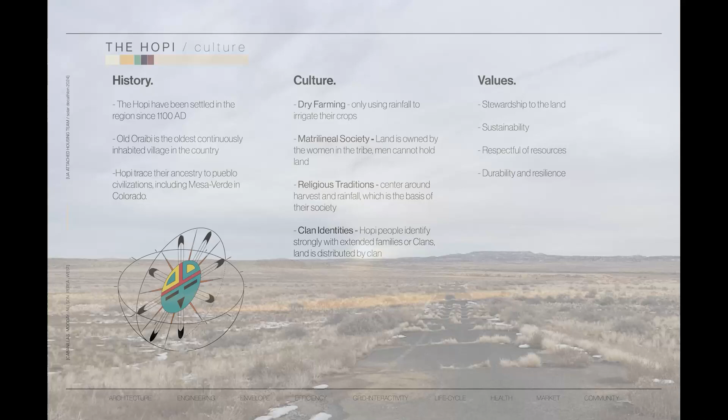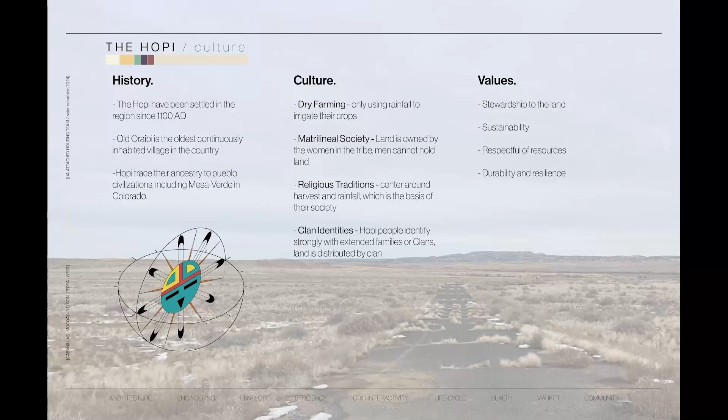We had the incredible opportunity to visit the tribe in January, where we learned that the Hopi have lived on their native land for thousands of years. Land is the basis of many aspects of their resilient culture, grounding their heritage within this landscape. Their values of stewardship to the land, sustainability, and resource savviness are apparent in their day-to-day practices, namely in dry farming and religious celebrations.

Of the 14,000 registered tribe members, only about half reside on the reservation, a number that is declining. Many young Hopi leave for job and educational opportunities in larger cities and often do not return, leading to a significant gap in the young and working age populations. This trend comes at the cost of losing touch with Hopi culture.

The aim is to encourage these populations to stay by creating Tawaovi to offer job opportunities, education, and modern conveniences on the reservation. Many of the Hopi still live in villages with traditional homes. 35% of Hopi homes lack running water and electricity, leading to an acute lack of safe and comfortable housing on the reservation. The Hopi asked for an attached housing proposal to help solve this problem.

The Hopi tribe used a detailed SWOT analysis to define the goals of the new village. They emphasized their rich historical and cultural values, but acknowledged challenges such as their coal dependency, lack of housing, and lack of infrastructure, issues that we aim to address through our project.

In their landmark Economic Strategy Council in 2000, the Hopi outlined the following vision for the future of the tribe: Hopi should be a place where Hopi culture and religion are strong, sacred sites are protected, culturally and environmentally sensitive development occurs, the land is looked after, there are jobs and businesses, quality infrastructure serves everyone, everyone has their own quality house, and public facilities serve all needs.

Our mission is to help the Hopi obtain their vision by providing comprehensive housing solutions that reinvest in their community and keep true to Hopi values.

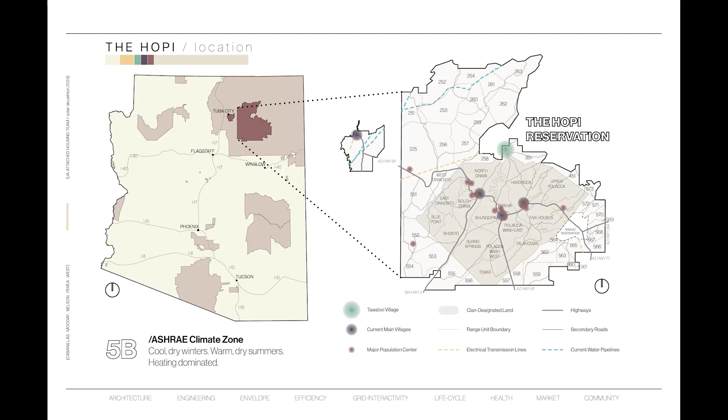Tawaovi, translating to Place of the Sun, or Sun Village, was chosen by the Hopi tribe to be on a remote site away from clan and spiritual lands. The project is in ASHRAE Climate Zone 5B, so it is cool, dry, and heating dominated, with an annual temperature range between 20 and 90 degrees.

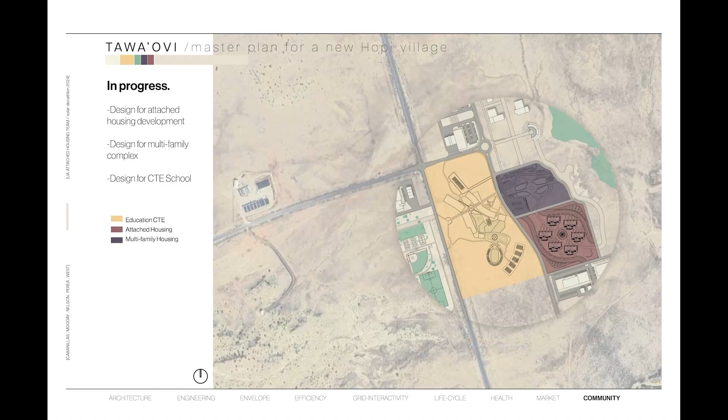This is the site of Tawaovi in its current state, as there has already been progress done on the solar farm. This is the progress being proposed by the Solar Decathlon Studio, including our attached housing site, seen in red, which neighbors the multifamily complex and the education building. These 3 projects will act as a strong base for Tawaovi, providing necessities.

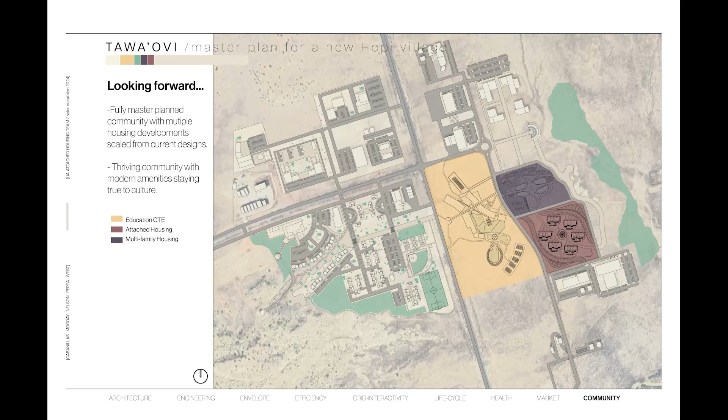In the future, this is what Tawaovi is imagined to expand to, creating a culturally rich and self-sufficient community that utilizes our scalable design to provide more housing as the community grows.

The Hopi's coal-dependent economy was devastated in 2019 with the closure of the Peabody coal mine, in which the nation lost 85% of their non-federal revenue, ultimately leading to their commitment to transitioning to clean and renewable energy moving forward. To achieve our ambitious goals, the first step is to establish a resilient energy source for this remote community, which is too far away to be connected to the main electric grid.

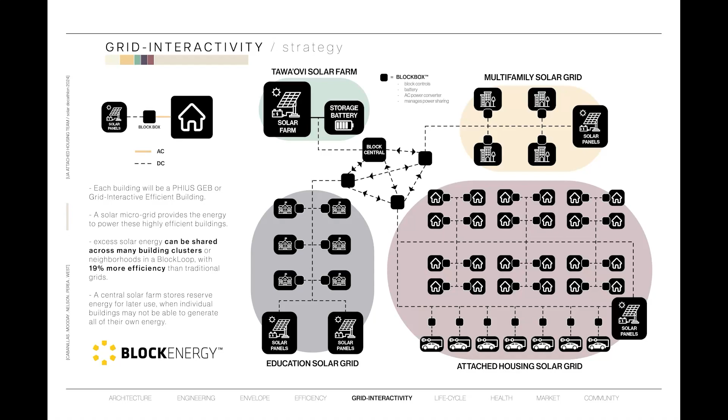Working with the existing solar farm, we are designing each building to be a PHIUS GEB, Grid Interactive Efficient Building, that draws energy from within a microgrid. Partnering with Block Energy, we utilize their innovative block boxes to distribute DC electricity from solar PV to each building.

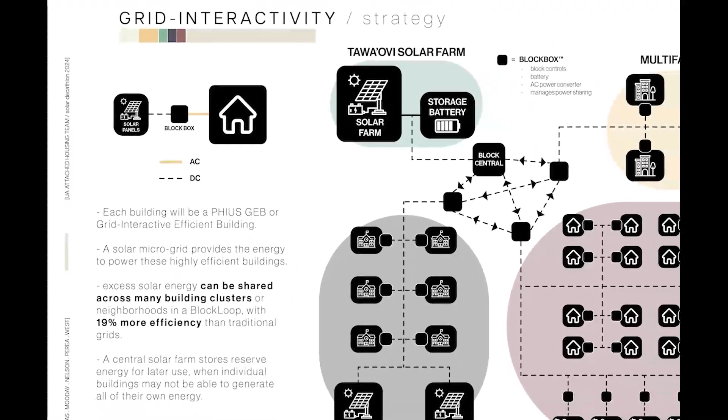These interconnected smart batteries allow seamless energy sharing, resulting in 19% higher efficiency than traditional grid systems. Moreover, neighborhood block loops can be connected to create a resilient grid of grids routed back to the solar farm, smoothing out duck curves, and most importantly, providing energy sovereignty to the Hopi.

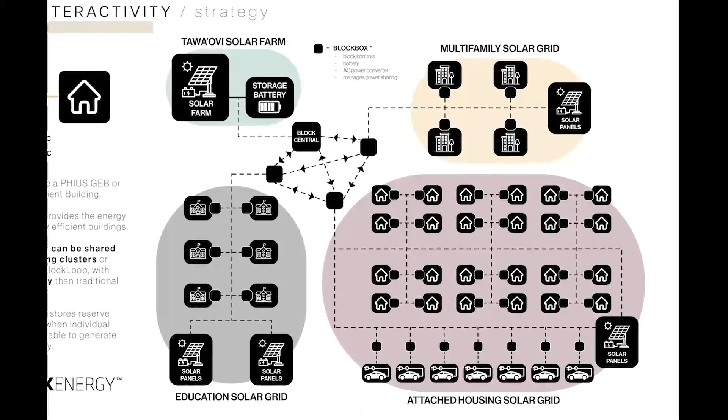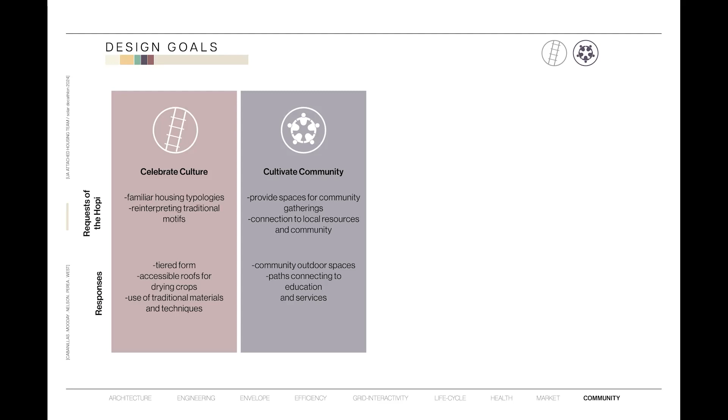We developed 4 goals that respond to the specific requests of the Hopi. First, we want to celebrate culture by implementing traditional Hopi design motifs that will allow people to resonate with the building. Second, we want to cultivate community by providing shared cultural spaces that will allow neighbors to connect. Third, we want to prioritize efficiency by adhering to PHIUS Zero standards and emphasizing passive strategies. Lastly, we want to promote well-being through careful site design and the use of clean energy.

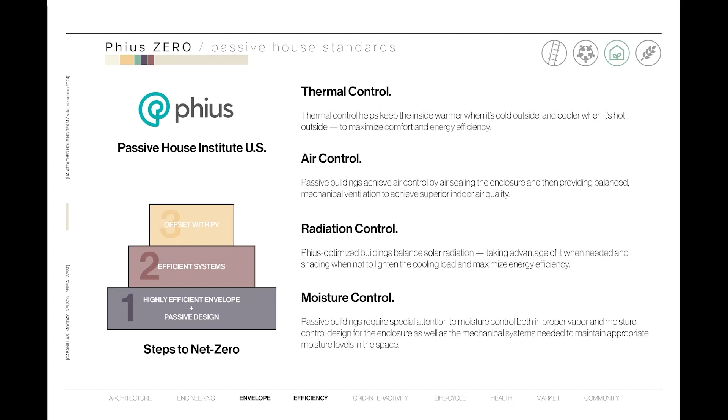Designing net zero homes can be challenging, but by aligning Harvest Mesa with PHIUS Zero standards, the path to net zero housing becomes clear. PHIUS prioritizes climate-specific thermal, air, moisture, and radiation control to create highly efficient interiors requiring minimal energy for heating or cooling. Using efficient systems offset by photovoltaics enables net zero energy consumption for the community.

Harvest Mesa features clusters oriented to maximize solar heat gain during the cold winter months. Per the Hopi's requests, the main paths are oriented on the summer solstice lines, anchoring this project in its environment. These paths lead to a central plaza, also serving as a jogging route, while berms and swales direct water flow to gardening plots at the corners of the site, enabling residents to cultivate their own crops.

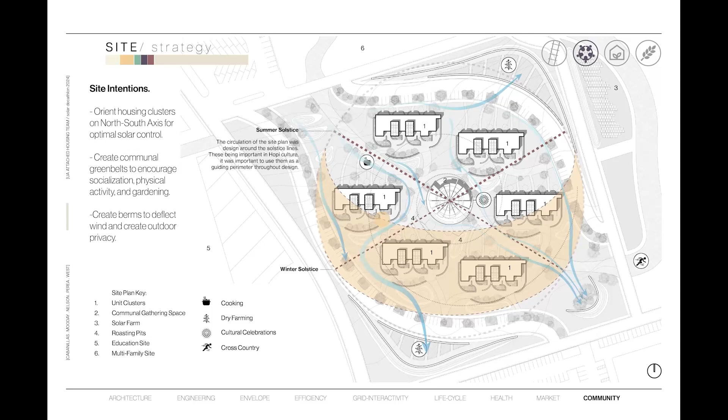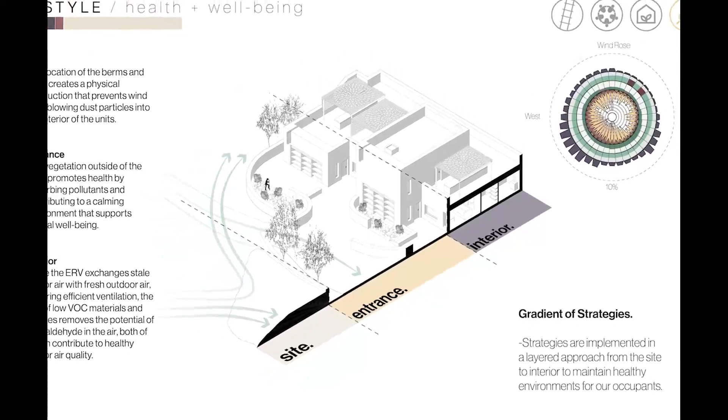We implemented health-enhancing strategies at 3 scales. On-site, berms and walls block windborne dust, and vegetated areas filter air pollutants. Inside each unit, an ERV supplies fresh air, improving air quality, and by utilizing clean energy, we prevent pollution, aligning with Hopi values.

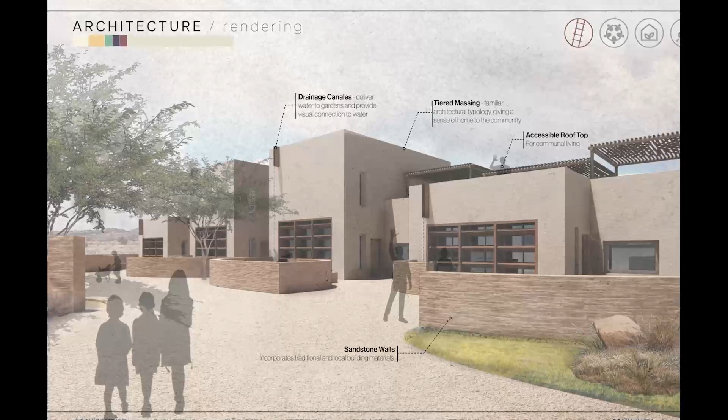To make this community feel like home, we've adapted traditional Hopi architectural motifs, including a tiered massing that enables close and communal living. Additionally, site walls create inviting spaces between units that gracefully encourage spontaneous interaction between the residents.

After harvest, the Hopi need space to sun-dry their crops, so we designed shading structures on the accessible rooftops. These shaded rooftops provide another opportunity for gathering within the condos.

We offer 2 unit types to accommodate different family sizes. There is a 2-bed, 1-bath unit and a 3-bed, 2-bath unit, with 2 of each totaling 4 units per cluster.

The Hopi asked for units to have an open floor plan as it allows for more space for celebrations and for families to cook together. We also included green spaces for each unit.

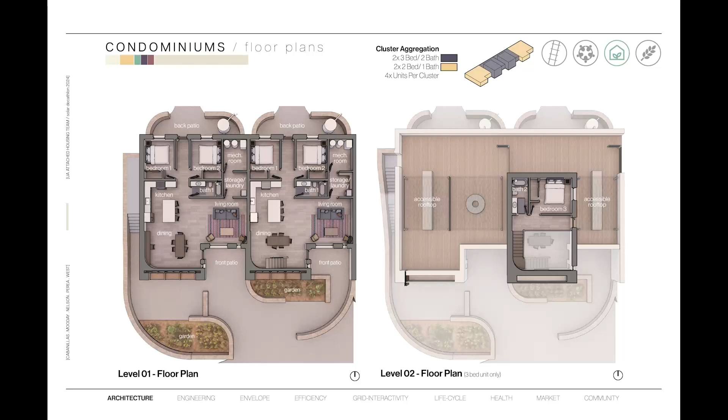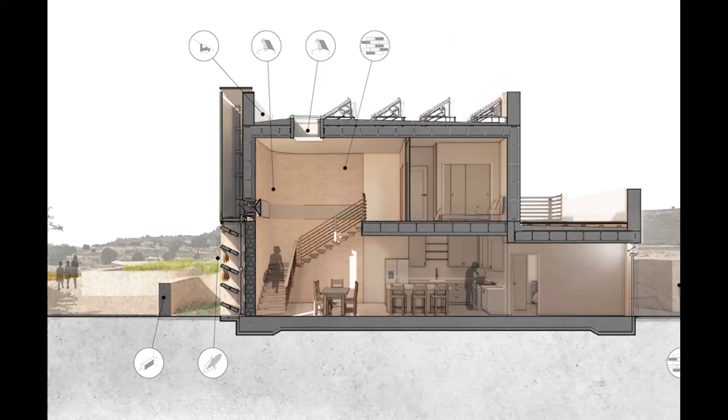In the interior, a rounded wall, light wooden staircase, and skylight reflect the form of the kiva, a space connected with Hopi spirituality. The Hopi were also excited that the use of sandstone will revive the Hopi masonry trade in the community, creating new jobs.

Due to the site's remote location, we opted for prefabricated parts for easy transportation and rapid assembly. We've teamed up with Timber Age Systems in Durango, Colorado, which manufactures PHIUS-certified CLT wall and roof panels that support healthy forests. Clusters are designed in modules with dimensions that fit the bed of a semi-truck.

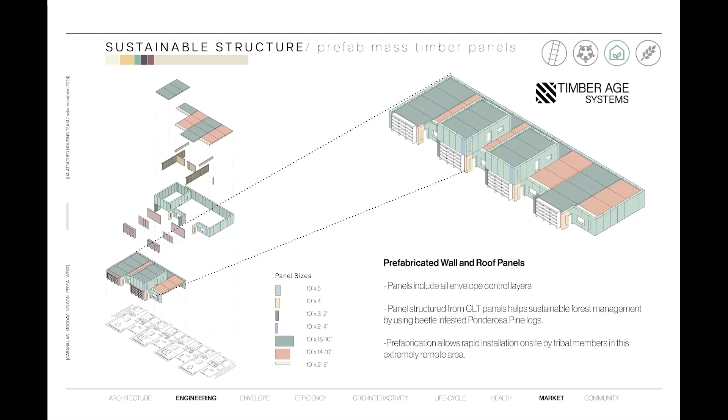Glulam beams support the second story with longer roof spans. Timber Age has volunteered to teach Hopi construction crew how to install panels on site, stimulating the local economy by creating construction jobs. Each panel features a 3-inch CLT panel for structure.

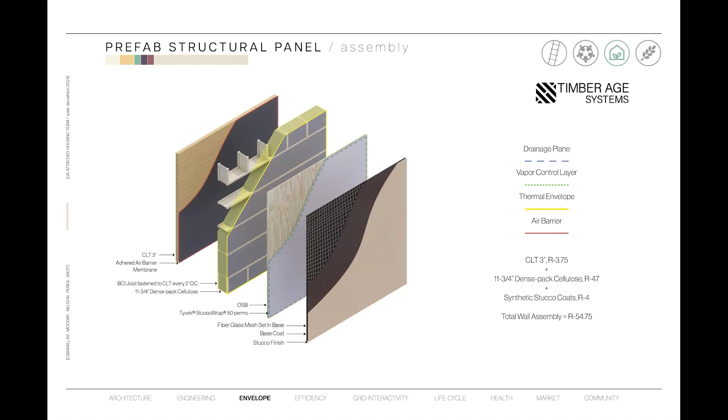Air and vapor control are included within the assembly, and thermal control is provided by dense packed cellulose sandwiched between 11-inch thick I-joists. Synthetic stucco is used as the exterior cladding, as it resembles traditional plasterwork but lasts longer in this harsher climate.

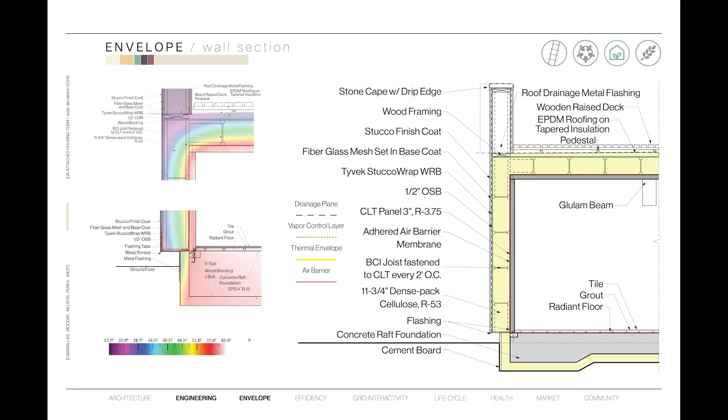Examining the wall section detail, we see again how the panels are designed to seamlessly connect with the roof and foundation, ensuring continuous insulation throughout and minimizing thermal bridging at connection points, as tested by our therm model. A pedestal paver system is also included to make the rooftops accessible.

The prefabricated panels, sourced from Timber Age in Durango, Colorado, address the challenges posed by the Colorado mountain pine beetle infestation. By repurposing dead, fallen trees for CLT production, Timber Age not only mitigates forest health risks such as wildfires, but also employs low-impact equipment to minimize carbon emissions.

Our analysis using one-click LCA indicates low carbon emissions from cradle to grave. Responding to the Hopi's preference for fewer, more efficient windows, we strategically place PHIUS-certified triple-paned windows for passive solar heat gain and optimal daylight, maintaining a low window-to-wall ratio.

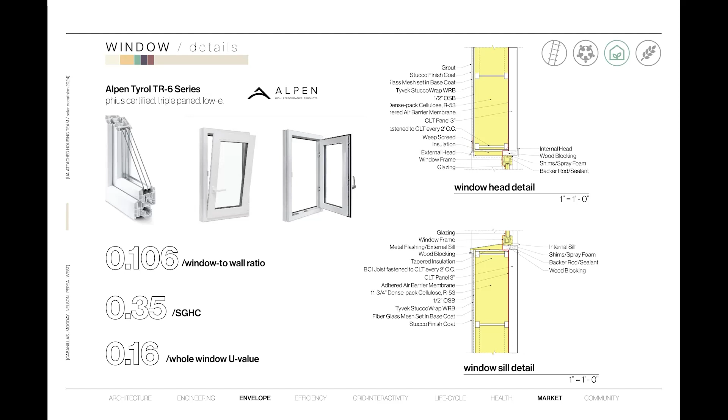We prioritized using local products and services to reduce transportation costs and reduce our carbon footprint. We've used sustainable materials that come in $500,000 under our Kickstart budget of $2 million provided by the CARES Act of 2020. As Hopi crews skill up and do more of the work themselves, we expect costs to decrease by 3.3% over time compared to conventional construction methods.

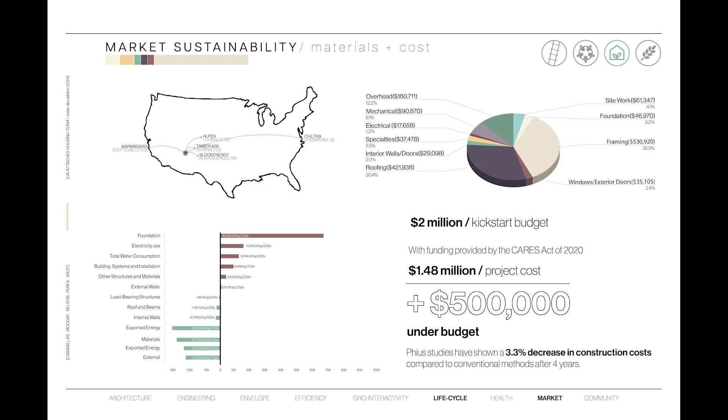This homegrown housing ensures access to clean energy, job security, education, and Hopi kinship within the reservation, strengthening the connection to their homeland. We were so excited about presenting our passive strategies because when meeting with our Hopi clients last month, they were really enthusiastic about how we have learned from their traditional wisdom and materials to provide comfortable, up-to-date, and efficient housing.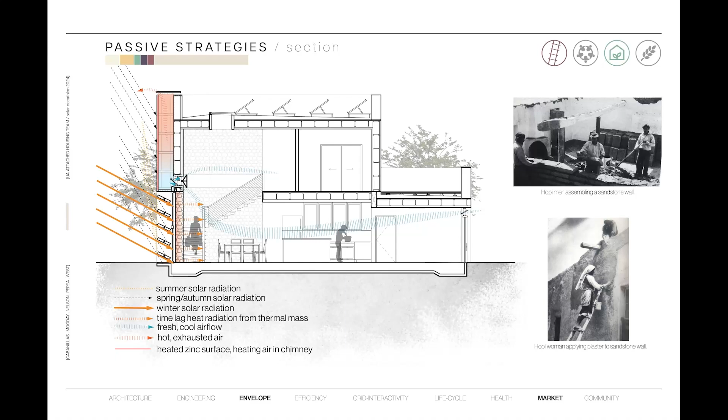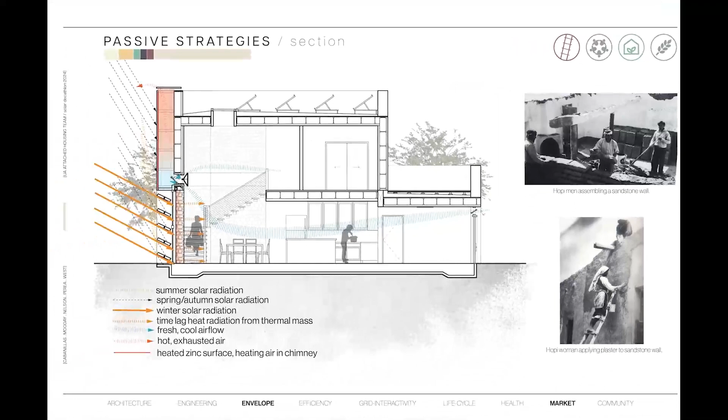Andrew, our tribe liaison, noted that for centuries the Hopi have utilized local sandstone for natural heating and cooling in their homes, a wise use of thermal mass. We've designed an innovative passive wall using this sandstone and a trombe wall combined with a solar chimney, leveraging the abundant sunshine for both heating and cooling in the project.

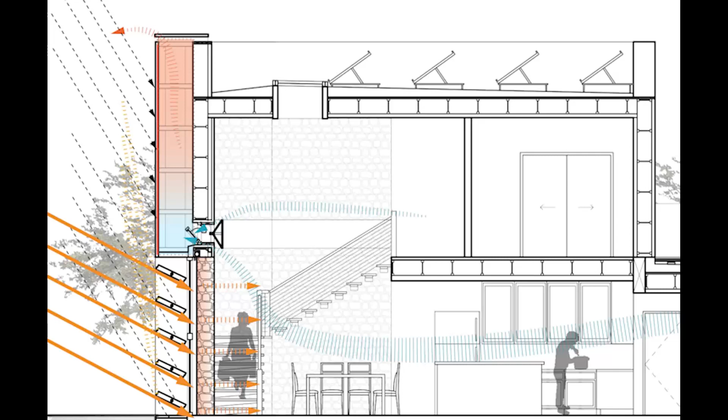In the trombe wall, sandstone absorbs and re-radiates heat, providing 24-hour heating and reducing mechanical loads upwards of 49%. In the solar chimney, air is heated and rises, drawing cooler air through the building, exiting through an automated triple-pane window which opens based on interior and exterior conditions.

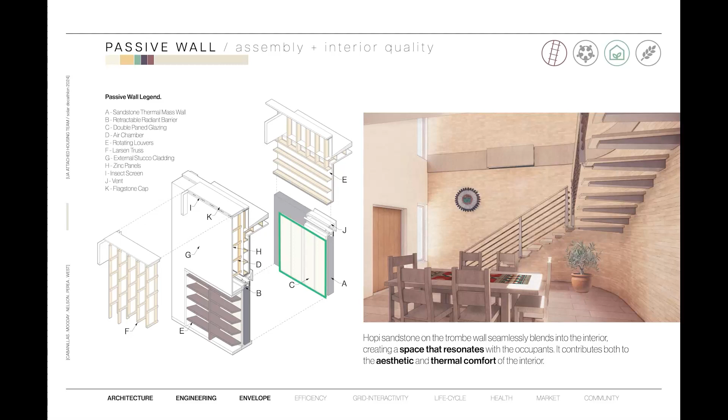The trombe wall covers a large part of the southern facade to maximize solar gain. The assembly includes clear glazing, which allows solar energy to charge up the sandstone thermal mass wall. Above, a Larsen truss creates an air chamber, an essential part of the solar chimney. Inside, the trombe wall has been fully integrated into the architecture, creating a kiva-like interior.

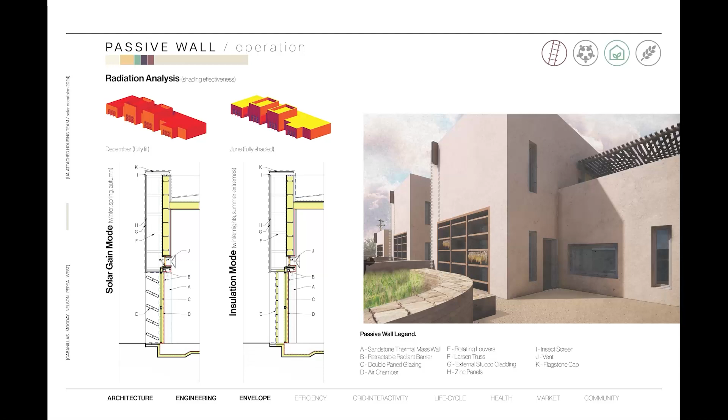Shading louvers play a crucial role in managing summer solar gain, as shown in the radiation analysis. Fully insulated, these louvers can be closed to create an additional thermal barrier of R15. Additionally, they provide space adjacent to the gardens for drying crops.

In the details, you can see how the decorative fascia conceals the operable window in the solar chimney, as well as the retractable radiant barrier in the trombe wall for added insulation.

A radiant floor system will be providing both heating and cooling. Hot and chilled water for the radiant system will be provided by a Chiltrix air-to-water heat pump and stored in a buffer tank which acts like a thermal battery.

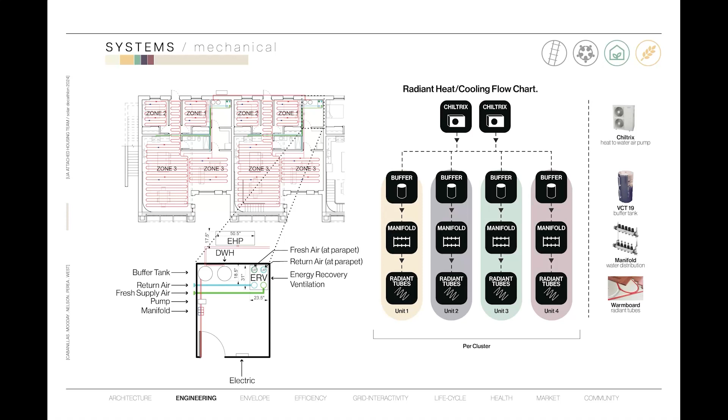From the tanks, a pump will send the water to a manifold that will distribute the water to the zones requiring space conditioning. A hydronic system is more efficient than a forced air system because one unit of water can carry much more heating or cooling energy than the equivalent amount of air. Moreover, it eliminates the need for refrigerant circulation, reducing the risk of leaks and the contribution to global warming.

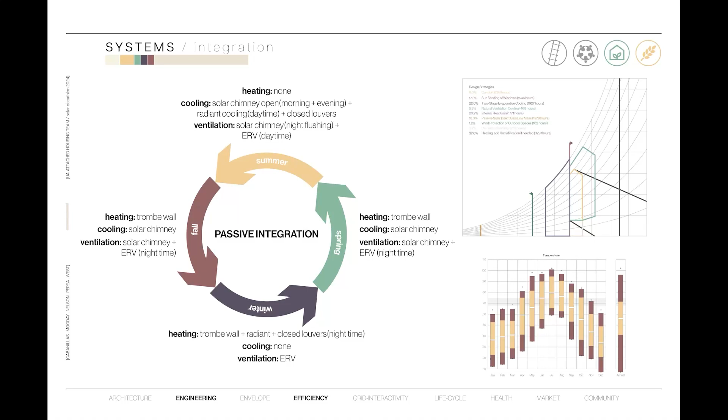Rain is an integral part of Hopi culture as it irrigates their dry farming and is the basis of many of their celebrations, meaning that they are conscious of their water usage. We've integrated a water harvesting system, directing roof runoff into cisterns at the back of each unit, with each one projected to collect 6,000 gallons annually. Additionally, rain chains at the front of each unit visually connect residents to water flow.

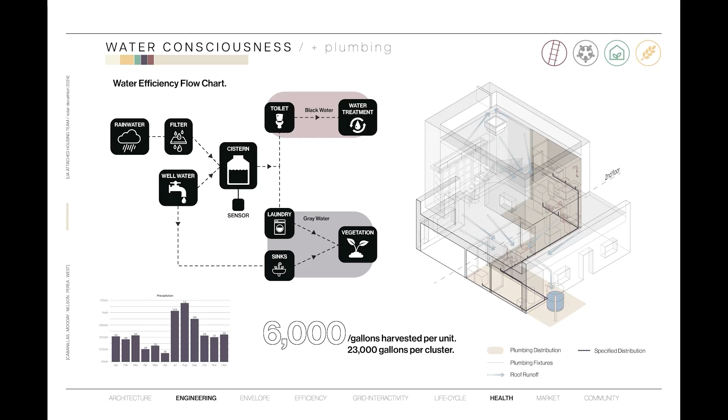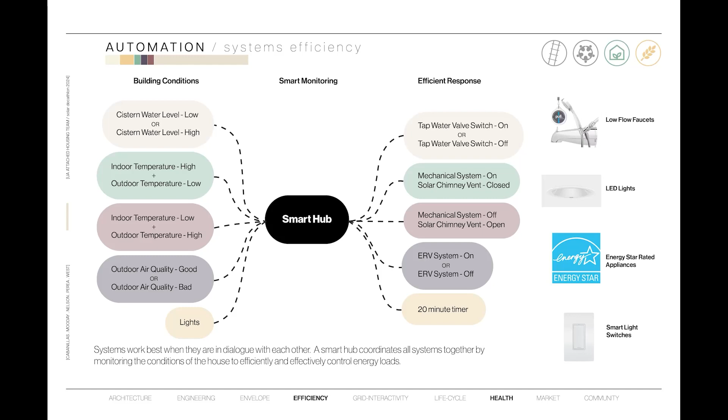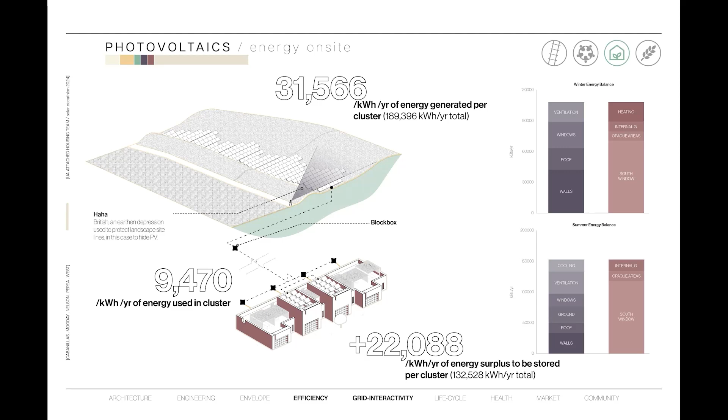Photovoltaics power Harvest Mesa. They generate more energy than the buildings use, giving a surplus of 22,000 kilowatt hours per year back to the grid, even accounting for worst-case weather scenarios. While some panels are located on the buildings, the remainder are located on-site, concealed by ha-has to preserve natural views.

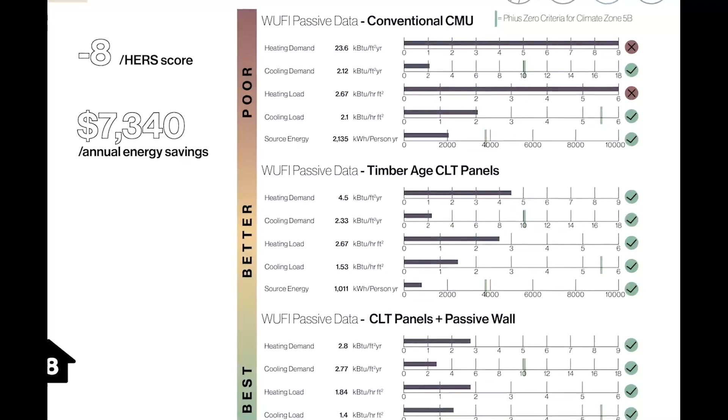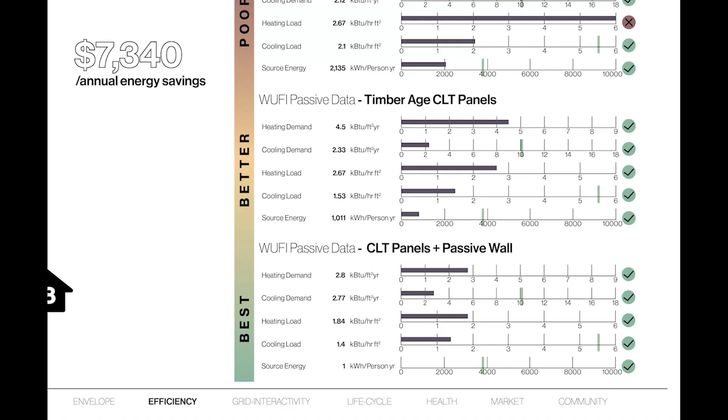By implementing climate-specific and passive strategies, we achieve comfortable net-zero condos with a HERS score of -8. Further analysis in WUFI Passive shows that we can't meet Phius standards by building to code, but the CLT panels we use get us to this target. And the optimized design significantly reduces heating demand, yielding $7,340 in annual energy savings per cluster.

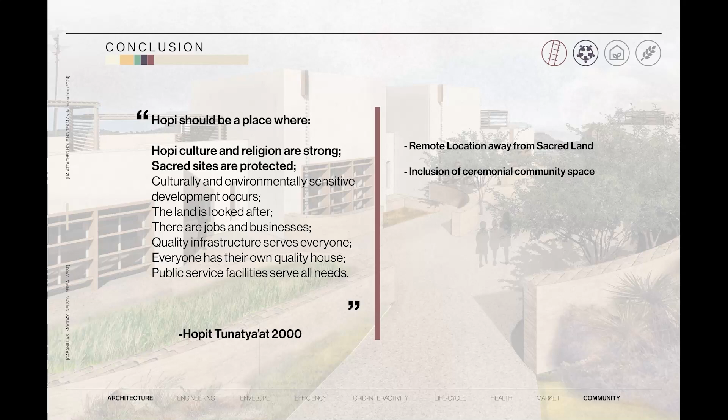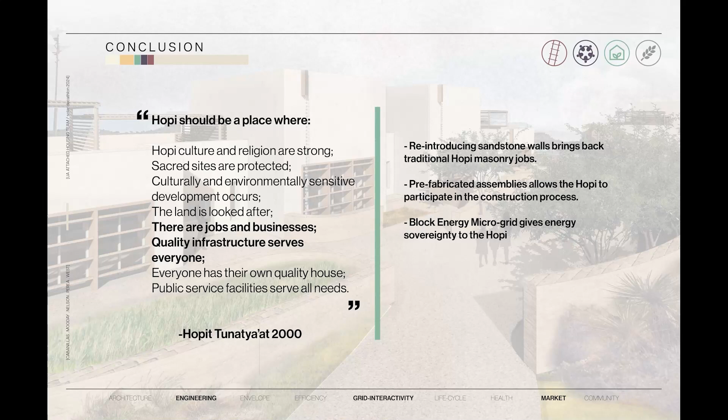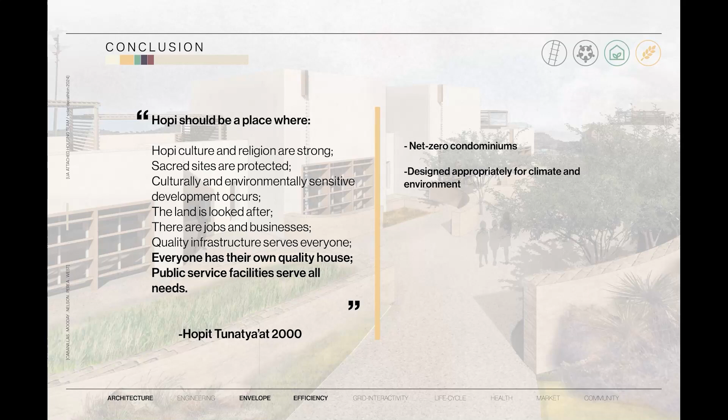Going back to the vision statement, we were able to work with a remote location away from sacred land and include a ceremonial community space. We also used low-impact materials and effectively managed water. Helping the economy and community, our design reintroduces masonry, a traditional Hopi skill, to bring jobs into the community. And Harvest Mesa provides a comprehensive and efficient energy grid that gives the Hopi sovereignty over their energy. Lastly, we are proud to provide the Hopi with this design for net zero homes designed with respect for culture, climate, and environment. And with that, welcome to Harvest Mesa!